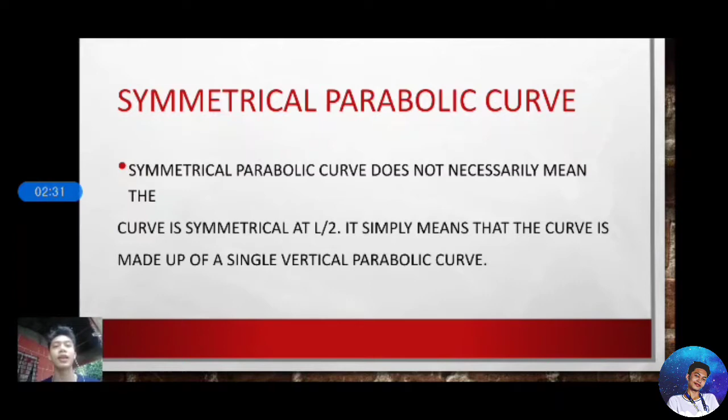Para sa mga examples, dito yung tatlong examples natin nakahanda. For example number 1: a summit curve has slopes of 6% and negative 4%, intersecting at PI. The offset distance from the PI to the curve is 2 meters. Determine the following: A. Length of curve. B. The location of the highest point from PI.

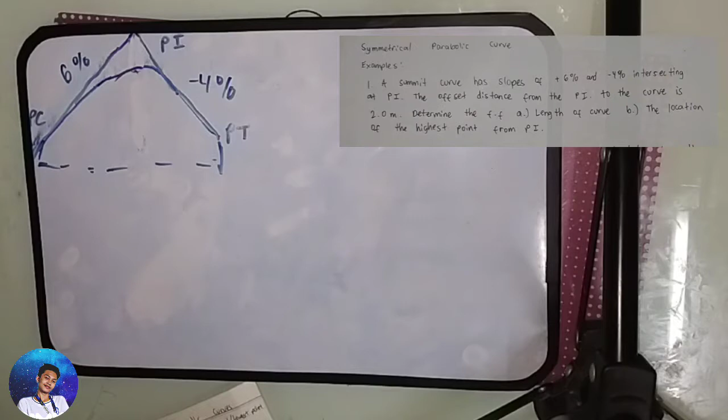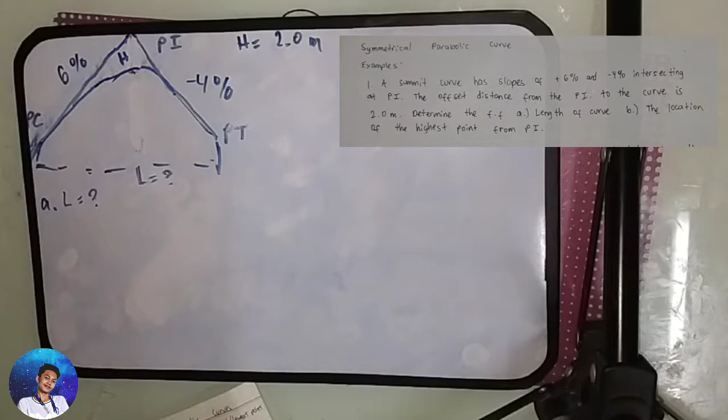So for our first example, we are given a grade of 6% for our back tangent, and for our forward tangent, negative 4%. So we are also given an offset distance, so our H is equal to 2.0 meters. We need to find first our A, length of curve, our L, and B, the location of our highest point.

So first, our L, we need to use our formula for a summit curve: H equals L over 8 times G sub 1 minus G sub 2. So 2.0 equals L over 8 times our G sub 1, 0.06, minus negative, so magiging positive, 0.04.

So we know our L, we need to compute. There's no shortcut solve, walang shortcut, so ganito yung ginagawa ko: 2.0 divided by 1 over 8 times 0.06 plus 0.04. So yun yung sagot, 160. So our L is 160 meters.

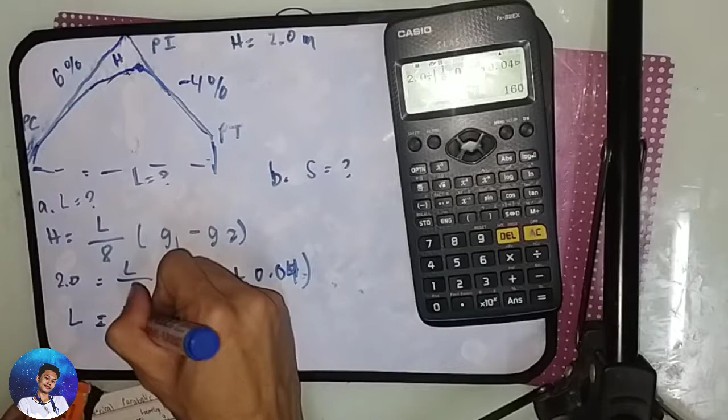And that's our A. So we can now proceed for our B, for the location of our highest summit curve. So from this, 160 meters, this L over 2 is 80, and this is also 80.

So our S, from PC, we need to use this formula: S equals G sub 1 times L over G sub 1 minus G sub 2. So S equals 0.06 times our L, 160, over 0.06 minus negative 0.04, so magiging positive, 0.04.

So we can get our S, or our location of our highest point. So our S: 0.06 times 160 over 0.06 plus 0.04, so 96 meters from PC.

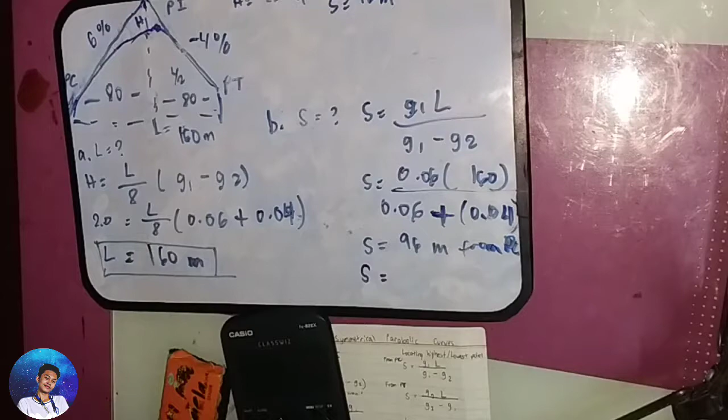But from our question, we need to find the highest point from PI. So we need from PI: 96 meters minus our S from PI, 96 minus 80 meters, because this is 80. So kailangan natin mahanap ito, ang distance na simula sa PI hanggang dito, kailangan natin mahanap.

So S, 96 minus 80 is 16, I guess. 16. So our location from PI is 16 meters from PI. So this is our final answer.

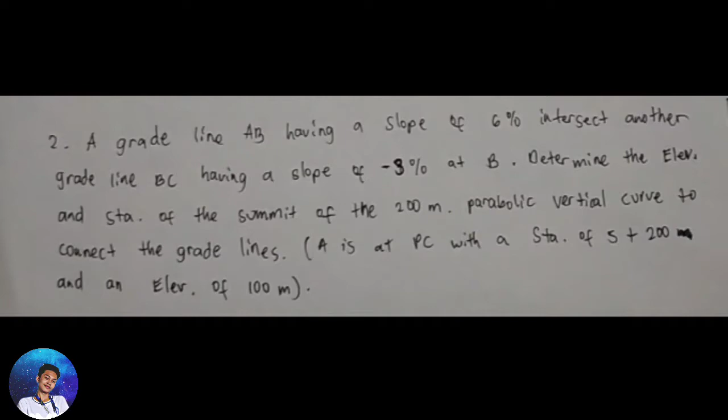For the second example: a grade line AB having a slope of 6% intersects another grade line BC having a slope of negative 3% at B. Determine the elevation and station of the summit of the 200-meter parabolic vertical curve to connect the grade lines. Yun, hanapin daw yung elevation tsaka station ng summit o yung highest point ng curve. A is at PC with a station of 5 plus 200 and an elevation of 100 meters.

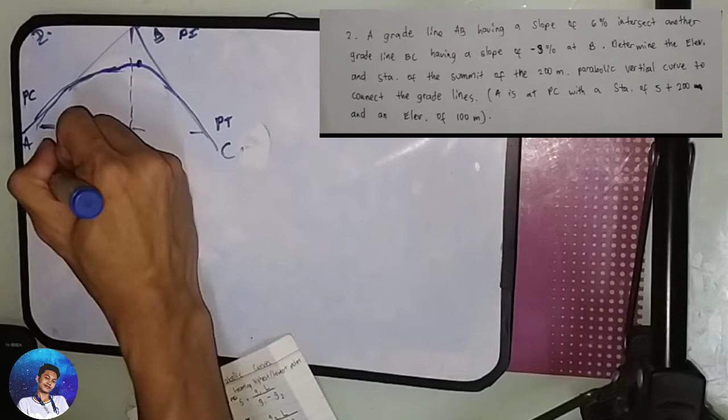So for our number 2, we need to find the elevation and stationing of the summit or the highest point of our curve. So first, we need to find the highest point. From PC, we need to use this formula: S equals G sub 1 times L over G sub 1 minus G sub 2.

0.06, I forgot, this is 0.06, a 6% grade, and this is negative 3% grade. And we're already given our L, or length of our curve, 200 meters, so our L over 2 is 100 meters. So our 0.06 G sub 1 times 200 over 0.06 minus negative 0.03 plus 0.03.

So our S, or highest point for our summit curve: 0.06 times 200 over 0.06 plus 0.03, which equals 133.33. So 133.333 meters. So we can calculate the station of our highest curve.

So this is 133.33. So the remaining, 133.333 minus 100 is 33.33. That's our distance from our highest point to PI, so right from PI, 33.33 from PI.

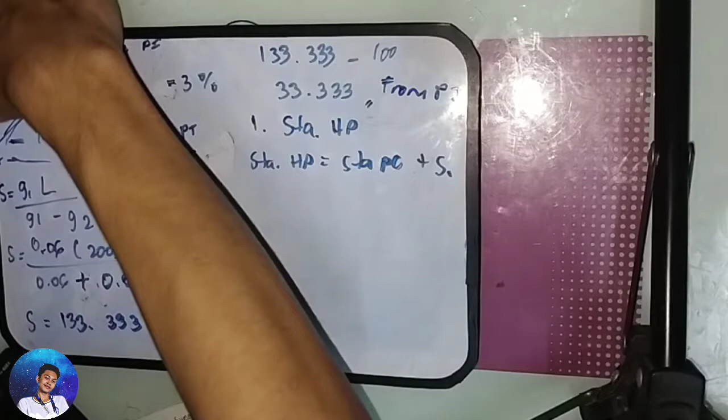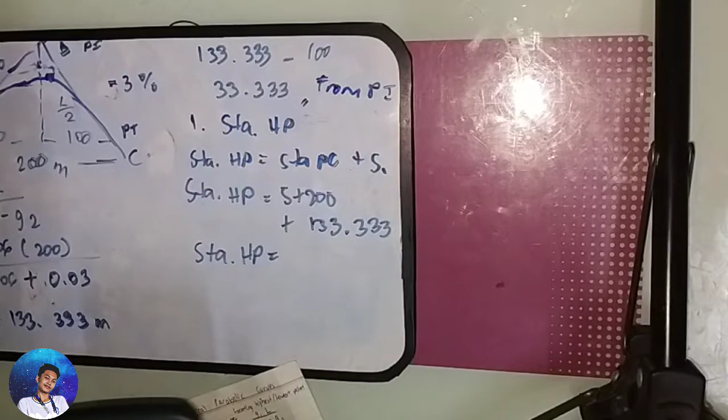133.333. So for number 1, for our stationing at HP: 5,200 plus 133.33 equals 5,333.333 is our station for the highest point. That's our number 1. So for our number 2.

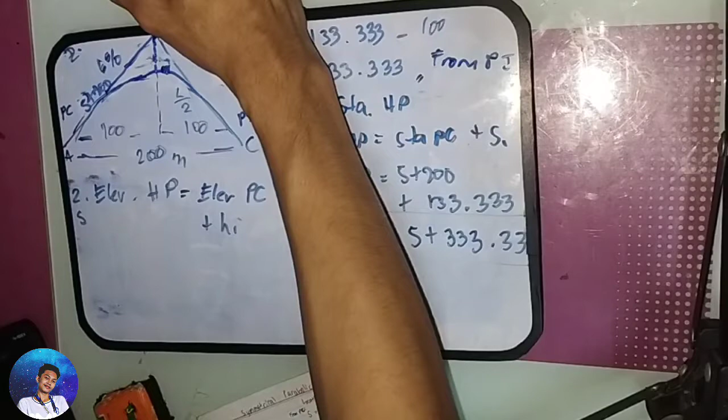For the elevation at highest point, the formula is: elevation of HP equals elevation of PC plus H sub 1. That's our H sub 1, plus elevation of PC. So once we solve that, we get the elevation of HP.

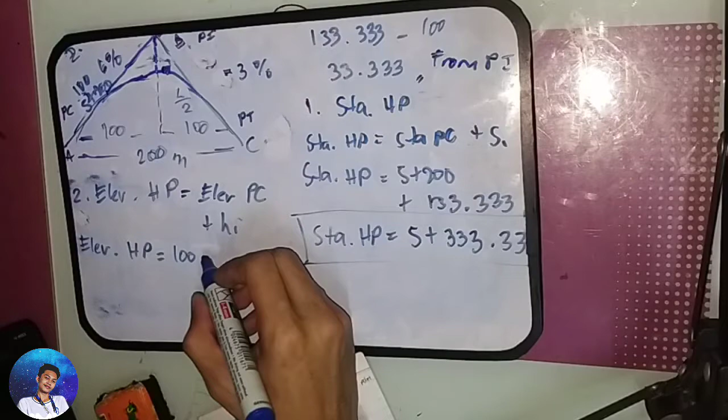So for the elevation of the highest point, we are given 100 meters as elevation. So 100 meters plus, we need to find H sub 1. So H sub 1 equals one half of our G sub 1 grade times our S sub 1.

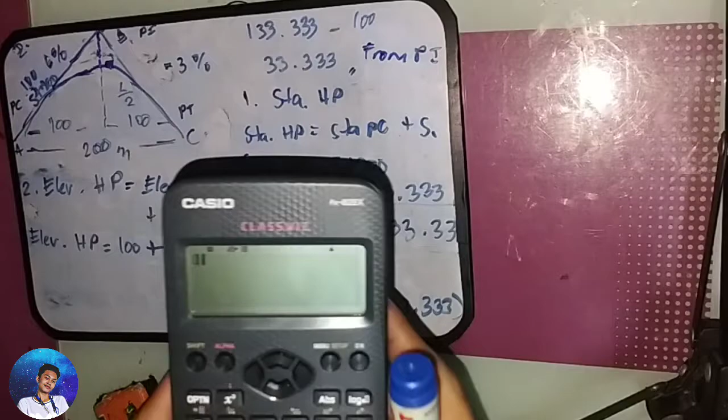So one half of our 0.06 times our S sub 1, 133.333. So our H sub 1 is one half of 0.06 times 133.333, which equals 3.999.

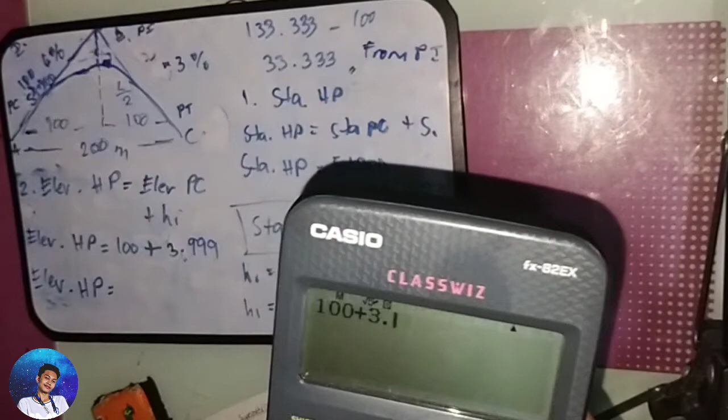So 100 plus 3.999. So we put that into our elevation for the highest point of our summit curve. So 100 plus 3.999 equals 103.999 meters. Don't forget our sign. So that's all for our number 1 and our example number 2.

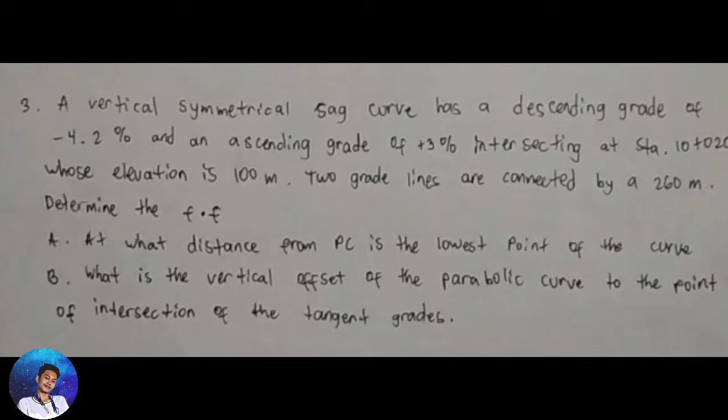For the last example, number 3: a vertical symmetrical sag curve has a descending grade of negative 4.2%, and an ascending grade of 3%, intersecting at station 10 plus 020, whose elevation is 100 meters. The two grade lines are connected by a 260 meter curve. Determine the following: A. At what distance from PC is the lowest point of the curve? B. What is the vertical offset of the parabolic curve to the point of intersection of the tangent grades?

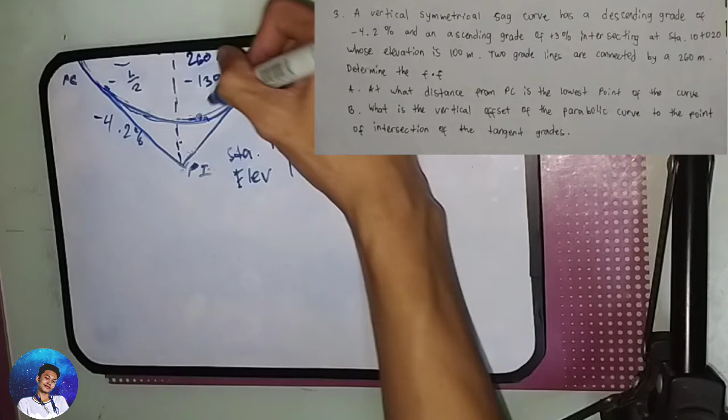So we need to find the distance from the PC to the lowest point of the curve. So let's find the lowest point of our curve. First, to get that, we use this formula: from PC, S equals G sub 1 times L over G sub 1 minus G sub 2. So we get S.

So our G sub 1 is negative 0.042 times 260 over negative 0.042 minus our G sub 2 of 3%, 0.03. So the value of our S is negative 0.042 times 260 over negative 0.042 minus 0.03. So our S is 151.667 meters. So yes, this is our number 1.

So for our number 2, we need to find the vertical offset, or our H. This is our vertical offset, so we look at our formula for H. Since it is a sag curve, we need to use this formula, not the other one. It is for the summit: H equals L over 8 times G sub 2 minus G sub 1.

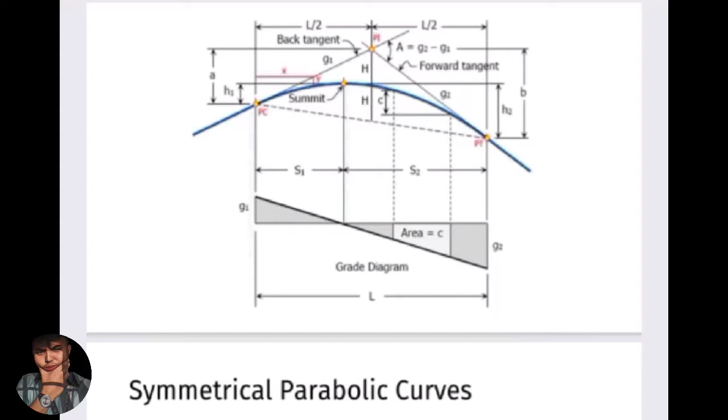So ano nga ba ang pinagkaiba ng parabolic symmetrical curve sa parabolic unsymmetrical curve? Symmetrical parabolic curve does not necessarily mean na symmetrical yung curve at L over 2. It simply means that the curve is made of a single vertical parabolic curve. Then, using two or more parabolic curves placed adjacent to each other, it will be called an unsymmetrical parabolic curve. So in a symmetrical curve, L sub 1 and L sub 2 are equal, while in an unsymmetrical curve, L sub 1 can be greater than L sub 2, or L sub 2 can be greater than L sub 1.

So let's now proceed sa ating problem solving.

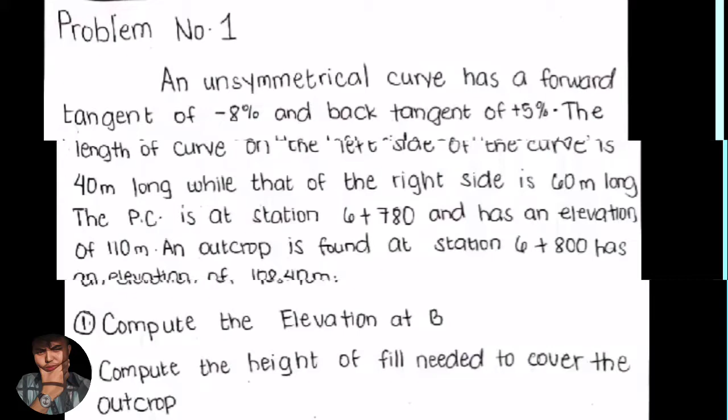An unsymmetrical curve has a forward tangent of negative 8% and back tangent of positive 5%. The length of curve on the left side is 40 meters long while that of the right side is 60 meters long. The PC is at station 6 plus 780 and has an elevation of 110 meters. An outcrop is found at station 6 plus 800 and has an elevation of 108.40 meters. Number 1, compute the elevation at B. Number 2, compute the height of fill needed to cover the outcrop.

So ano nga ba yung outcrop? Sabi ni Google, an outcrop is a rock formation that is visible on the surface.

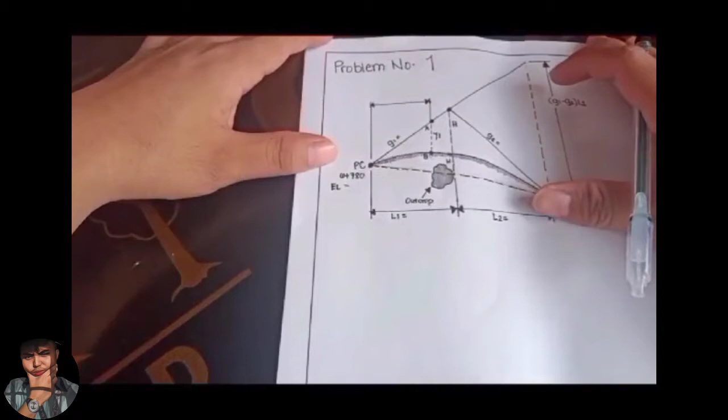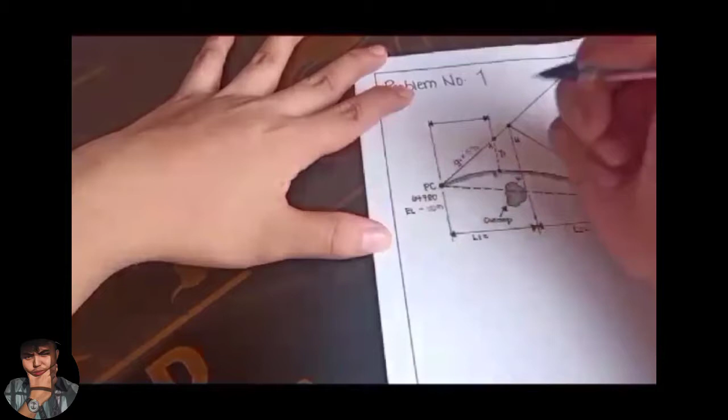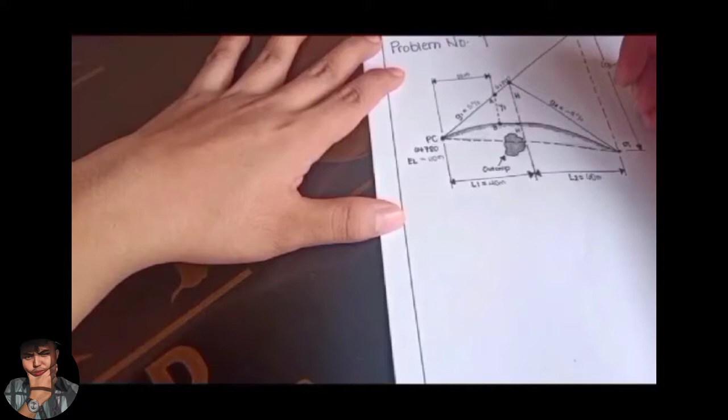So here is our figure for problem number 1. Given tayo ng positive 5% na grade at negative 8% na grade. At station PC, meron tayong 6 plus 780 and it has an elevation of 110 meters. At station A, meron tayong 6 plus 800. Therefore, ang distance natin from PC to point A ay 20 meters, kasi 800 minus 780 is equals to 20. Ang L sub 1 natin ay 40 from left and 60 from right, meters yan. Meron tayong outcrop dito which has an elevation of 108.40. So yun lang ang ating given.

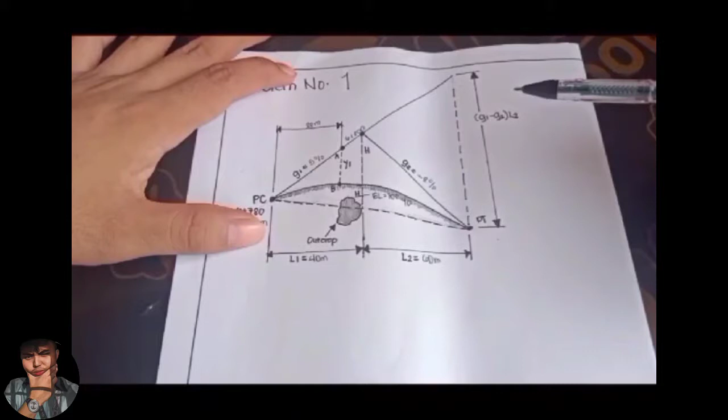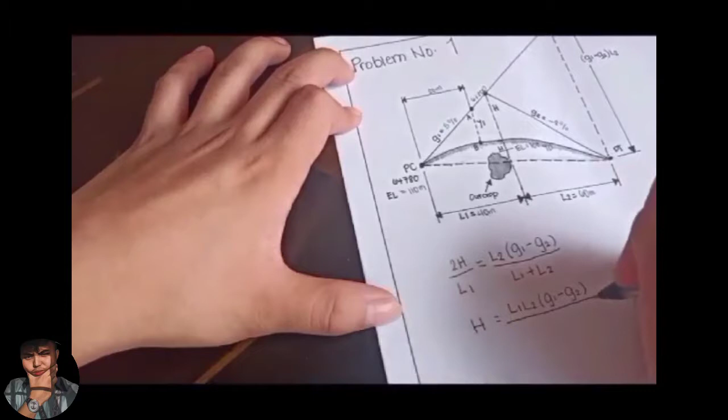So in order to get the value of H, we need to use the formula: 2H over L sub 1 is equals to L sub 2 multiplied by G sub 1 minus G sub 2, all over L sub 1 plus L sub 2. By manipulating the formula, we came up with H is equals to L sub 1 times L sub 2 multiplied by G sub 1 minus G sub 2, all over 2 times L sub 1 plus L sub 2.

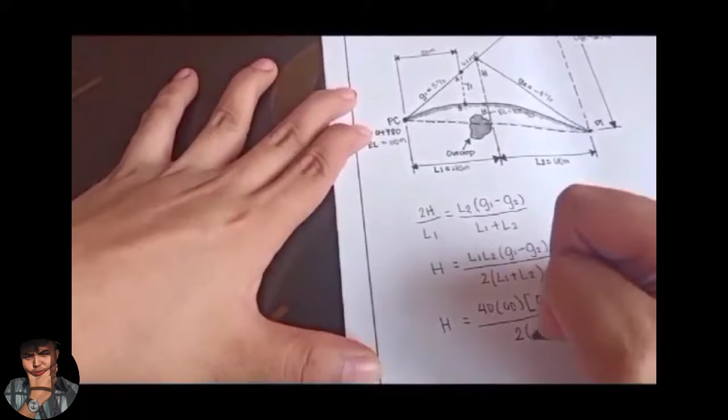So next is substituting the values. H is equals to 40 times 60 multiplied by 0.05 minus negative 0.08, all over 2 times our L sub 1 which is 40, L sub 2, 60. Kapag binisa sa value, magiging sagot is 1.56. So meron na tayong value ng H.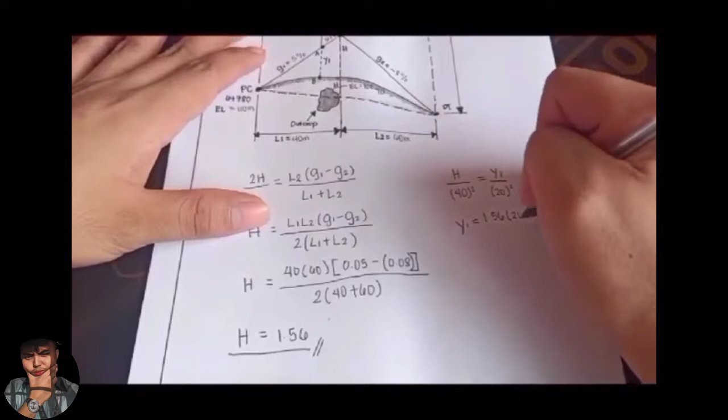Since meron na tayong value ng H, pwede na natin makuha yung ating Y sub 1. H over 40 squared equals Y sub 1 over 20 squared. Since meron na tayong value ng H na 1.56, Y sub 1 is equals to H multiplied by 20 squared all over 40 squared. Therefore, our Y sub 1 is 0.39.

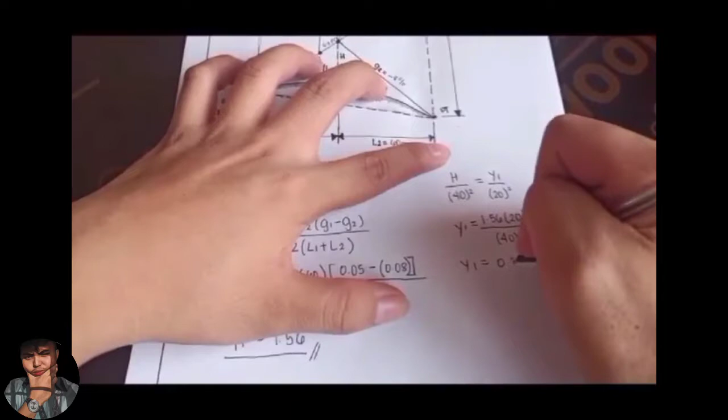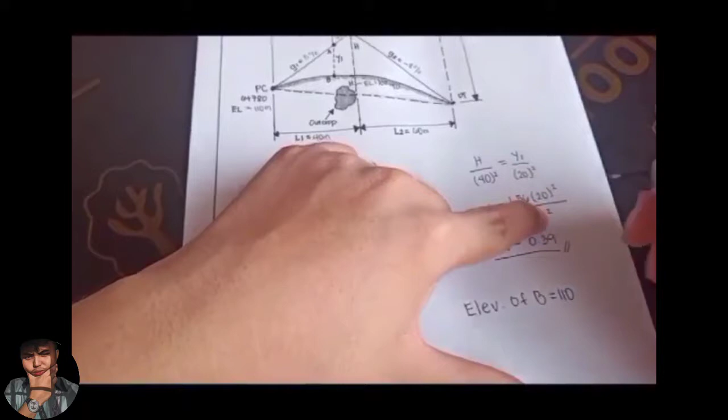Since meron na tayong Y sub 1, pwede na natin kunin yung elevation of B. Therefore, elevation of B is equals to 110 plus 0.05 multiplied by 20, minus our Y sub 1, which is 0.39.

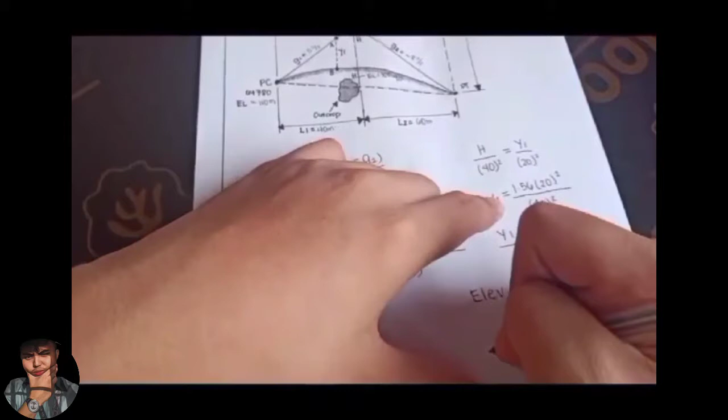Therefore, our elevation at B is 110.61 meters. So yan ang ating elevation at B.

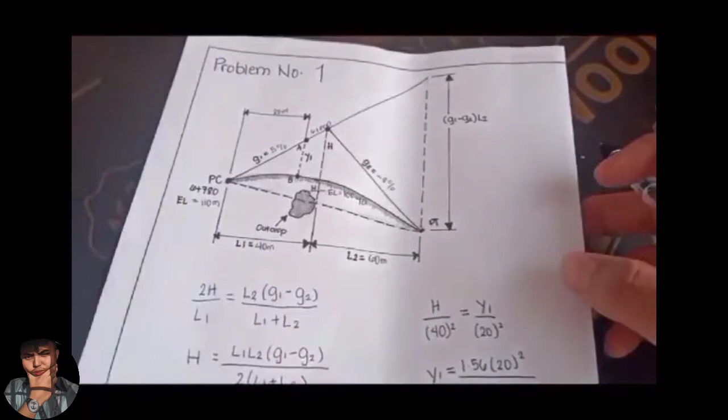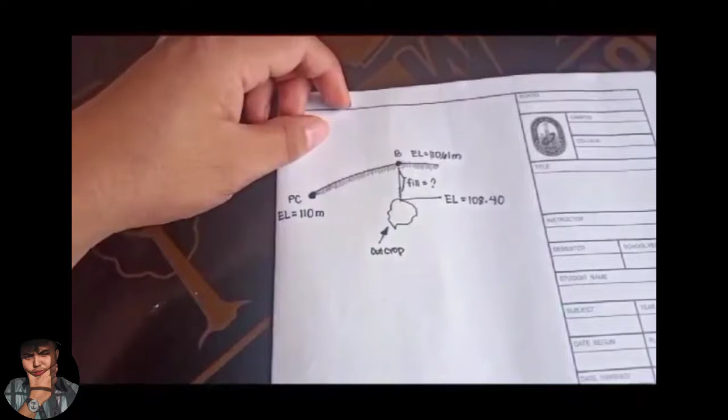So sabi sa ating condition number 2, ano daw yung height of fill needed to cover the outcrop. So kapag zoom in natin ito, yung kakalabasan. Nakuha na natin yung ating elevation at point B, which is 110.61, and the elevation of the outcrop is 108.40 meters. So in order to get the height of the fill needed to cover this outcrop, we need to subtract the elevation at B to the elevation of the outcrop.

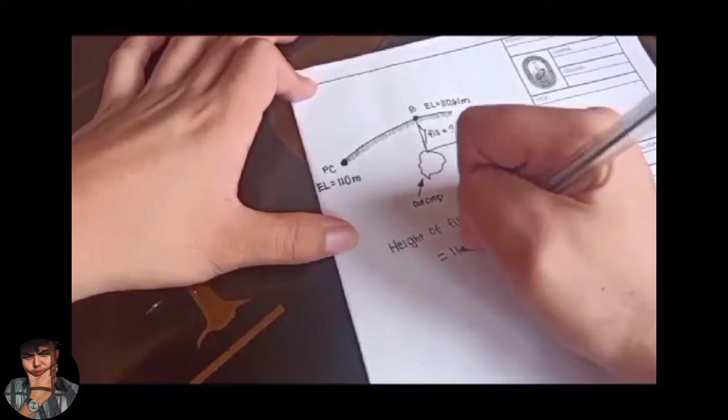So, height of fill needed is equals to 110.61 minus 108.40. Therefore, it is equals to 2.21 meters. So ito yung height ng fill na needed. So that is our problem number 1.

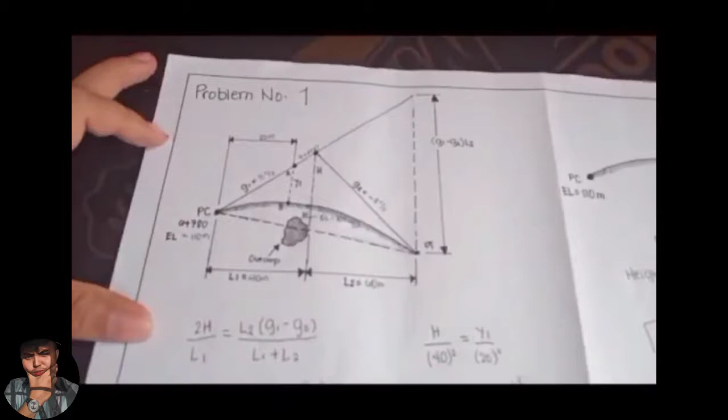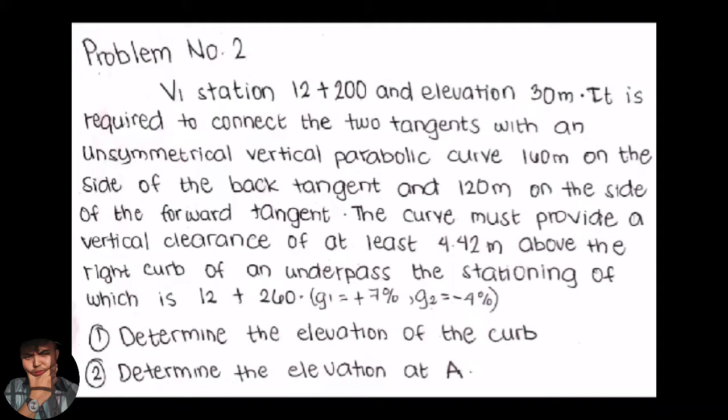V sub 1 station 12 plus 200 and elevation 30 meters. It is required to connect the two tangents with an unsymmetrical vertical parabolic curve, 160 meters on the side of the back tangent and 120 meters on the side of the forward tangent. The curve must provide a vertical clearance of at least 4.42 meters above the right curb of an underpass, the stationing of which is 12 plus 260. Knowing that G sub 1 is equals to positive 7% and G sub 2 is equals to negative 4%. Number 1, determine the elevation of the curb. Number 2, determine the elevation at A.

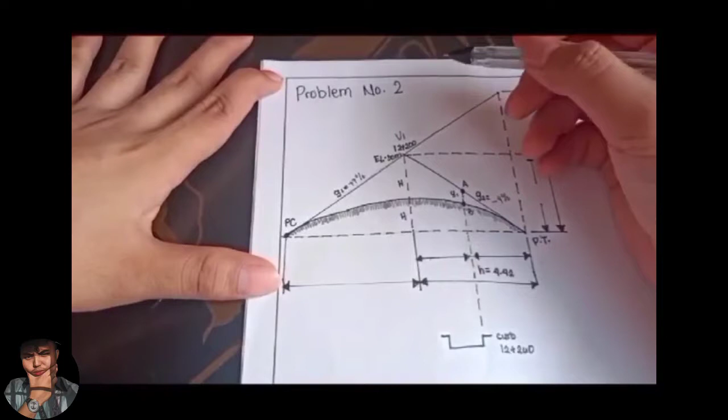So this is our figure for our problem number 2, which is a summit curve, since ang grade natin is from positive to negative. Kaya ganito. So sabi ang G sub 1 natin is positive 7%, and ang G sub 2 is negative 4%. And meron daw tayong at V sub 1 station, meron tayong 12 plus 200 with an elevation of 30 meters.

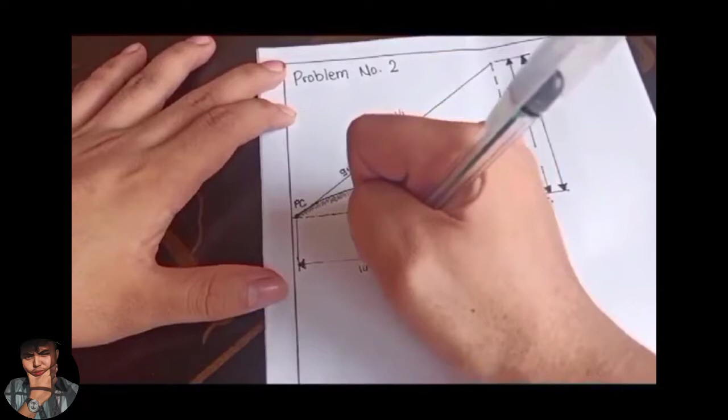At the back tangent, meron tayong distance, which is 160 meters, and the forward tangent has 120 meters. So here meron tayong height na given, which is 4.42. And our curb is at station 12 plus 260, which is dito. So since ito ay 120, so therefore ito ay 60 meters, and this is 60 meters also.

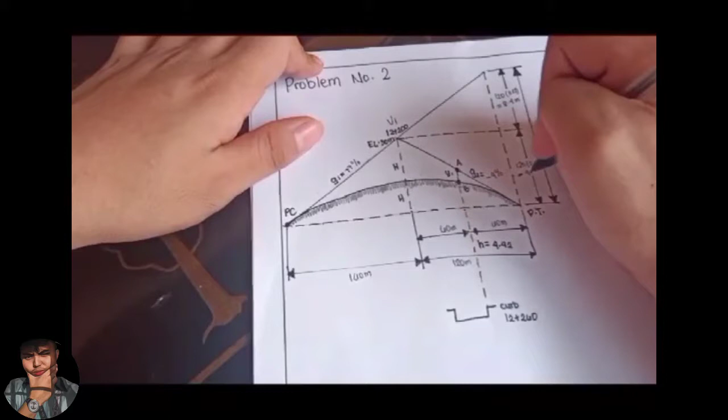Kailangan natin compute yung side na to. So 120 multiplied by 0.07, rather, this will be 8.4 meters, and this part is 120 multiplied by 0.04. Therefore it is equals to 4.8 meters. Therefore it is 13.2 meters in total. Pwede nyo namang diretsuhin na lang, same lang din naman lalabas. 0.11 multiplied by 120 is equals to 13.2 pa rin.

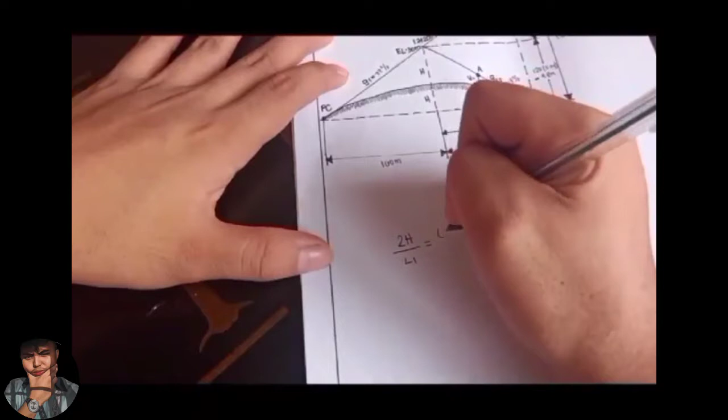Ayun, compute ulit tayo ng H. So using this formula, 2H, for L sub 1 is equals to G sub 1 minus G sub 2, multiplied by L sub 2, all over L sub 1 plus L sub 2. Then 2H is equals to 160... is equals to, nakuha natin 13.2 over L sub 1 plus L sub 2 is equals to 280. Therefore, ang ating H is equals to 3.77 meters. So yan ang ating H.

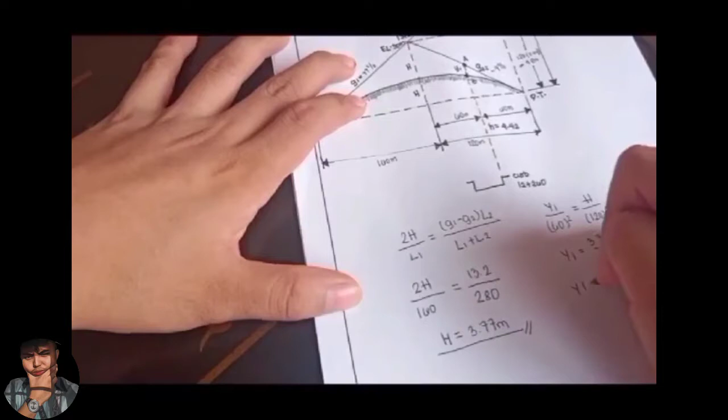Ngayon, kukunin naman natin yung ating Y using the squared property of parabola. So meron tayong y sub 1 over 60 squared is equals to h over 120 squared. Since meron na tayong h, so ang y sub 1 natin is equals to 3.77 multiplied by 60 squared over 120 squared. And y sub 1 is equals to 0.94.

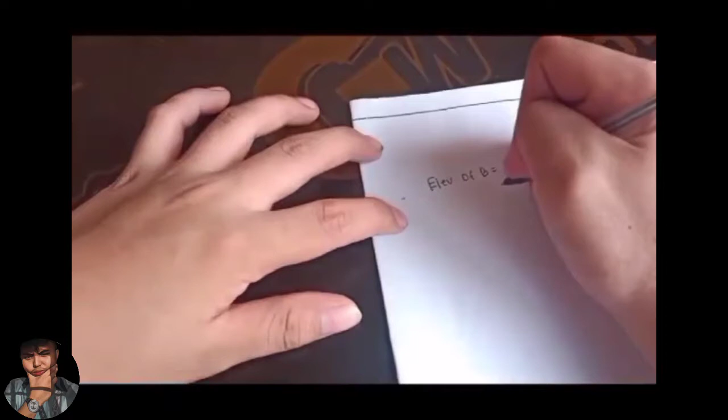So kagaya ng problem number 1, pwede na natin makuha yung ating elevation at B, since nakuha na natin yung y sub 1 natin. So elevation at B is equals to 30 minus 60 multiplied by 0.04, minus 0.94. So elevation at B is equals to 26.66 meters. Saan galing yung 30? Dito po galing yung 30 natin.

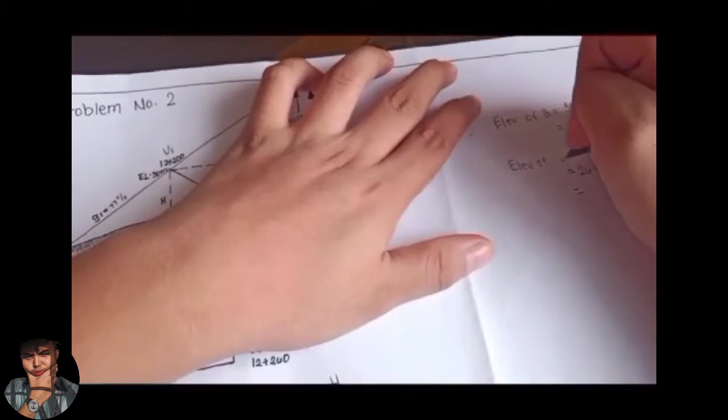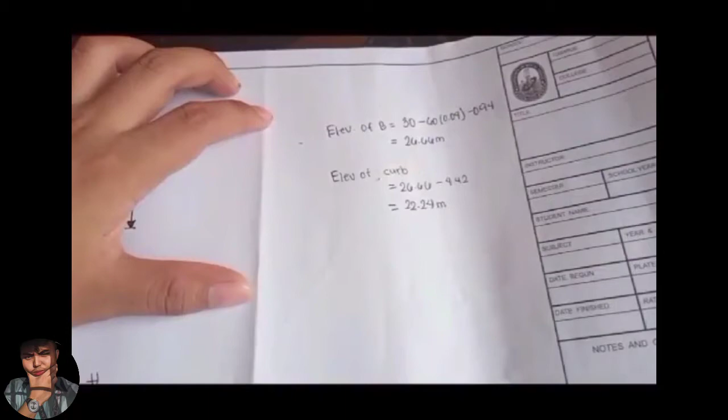So next na makukuha na natin is yung elevation ng curb. Para makuha yung elevation ng curb, kailangan lang natin gawin is subtract yung elevation at B dun sa ating height minus 4.42. So therefore, ang ating elevation of the curb dito, curb pala dapat, not curve, curb. So elevation of the curb is 22.24 meters. Ayan ang ating condition number 1.

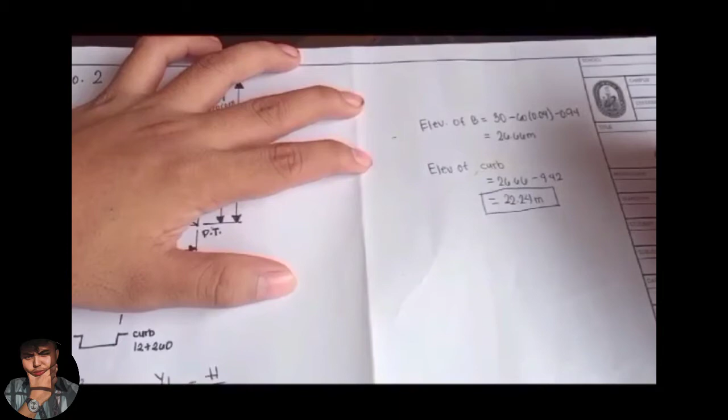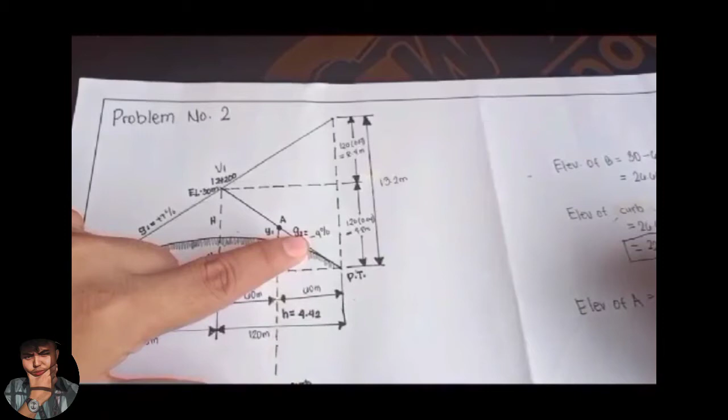So for number 2, determine the elevation at A. Napakadali lang nun. So in order to determine the elevation at A, yung next na kailangan natin hanapin is yung elevation of A. So elevation of A is equals to, ito yung A natin, so it's 30 minus our grade, which is our slope, 0.04 multiplied by 60. Therefore, our elevation at A is equals to 27.6 meters.

So, here is our problem number 3. A negative 3% grade meets a positive 5% grade near an underpass in order to maintain the minimum clearance allowed under the bridge and at the same time introduce a vertical transition curve in the grade line. It is necessary to use a curve that lies 200 meters on one side of the vertex of the straight grade and 100 meters on the other.

The station of the beginning of the curve, 200 meter side, is 10 plus 000 and its elevation is 228 meters. Number 1: determine the elevation at station 10 plus 040. Number 2: if the uphill edge of the underside of the bridge is at station 10 plus 220 and at elevation 229.206 meters, what is the vertical clearance under the bridge at this point?

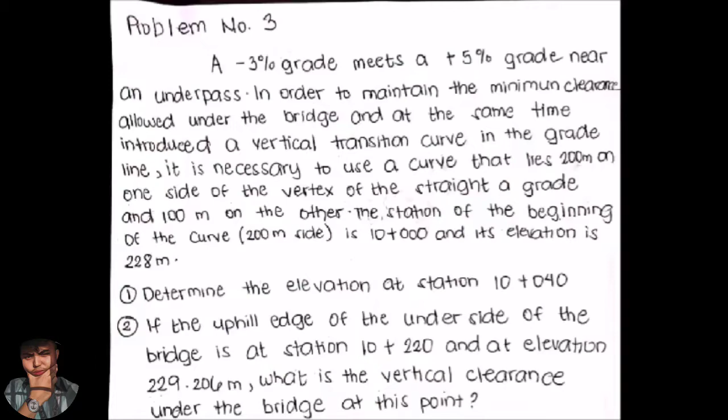So what exactly is vertical clearance? According to Google, vertical clearance means the minimum specified height of the bridge or overhead projections above the roadway.

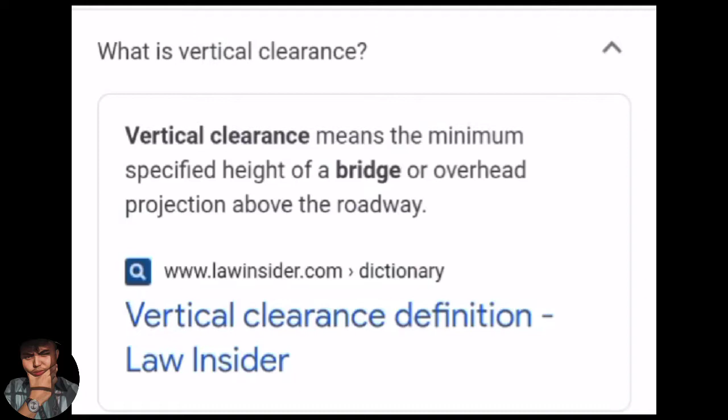Commonly we see this in establishments, especially in malls. Vertical clearance also applies to electric posts where we see wires. Commonly, the minimum vertical clearance is 10 feet from the ground.

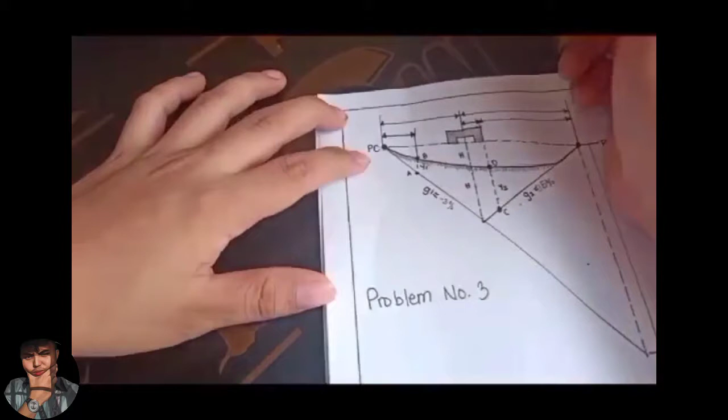Okay, so this is our figure for problem number 3. As stated in the problem, we have a grade or slope of 3% and 5%. The distance on this side is 200 meters, and the other side is 100 meters.

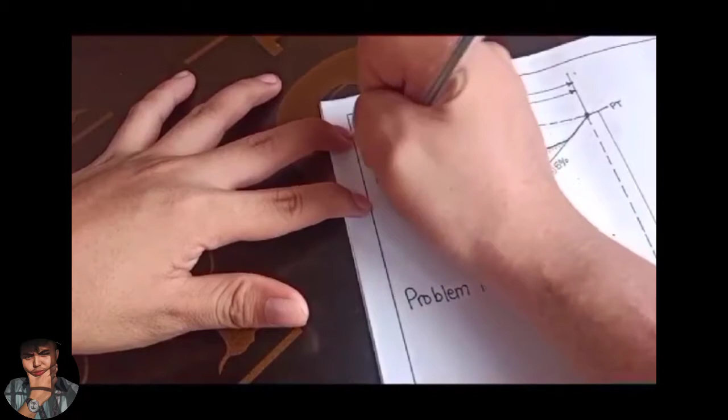The station PC is 10,000 and it has an elevation of 228 meters. So considering A as station 10 plus 040.

Therefore, the distance here is 40 meters. Next, let's get this side: 100 multiplied by 0.03 plus 0.05, and it equals 8.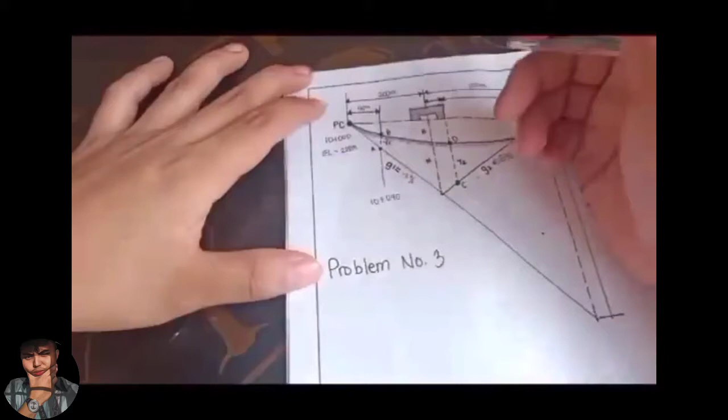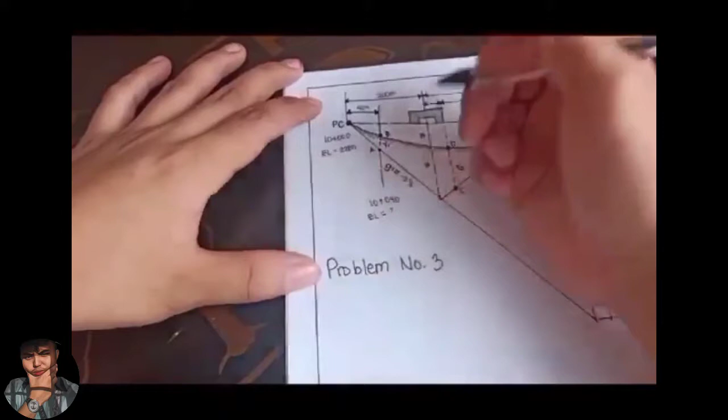Since we're first getting the elevation at this point per station, let's not consider the bridge yet. So we can now get our h.

So 8 over 300 equals 2h over L sub 1, which is 200. Therefore, our h equals 2.67 meters.

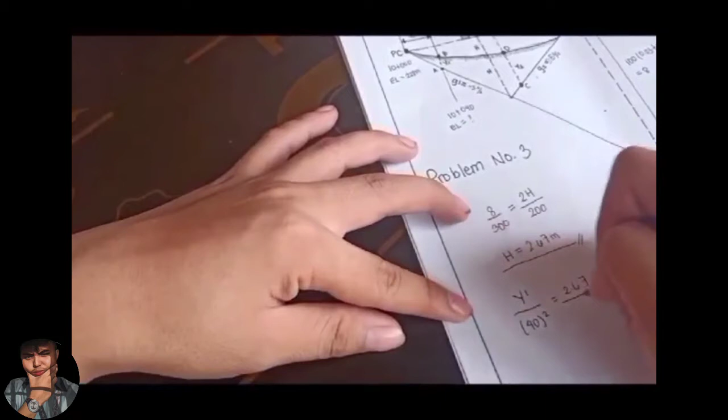By applying the squared property of parabola, we can get the value of our y sub 1. So 2.67 over 200 squared. Therefore, our y sub 1 equals 0.107.

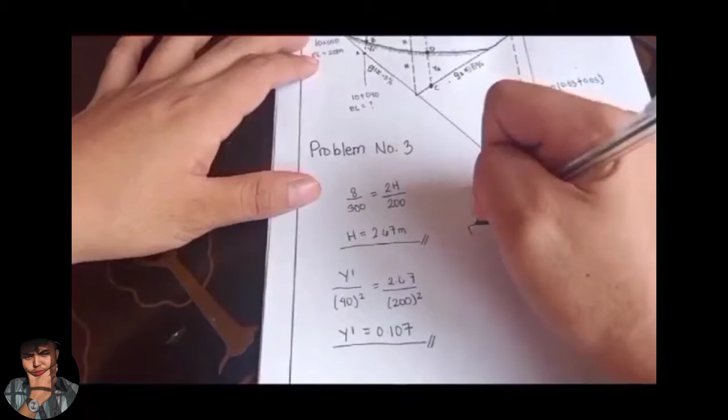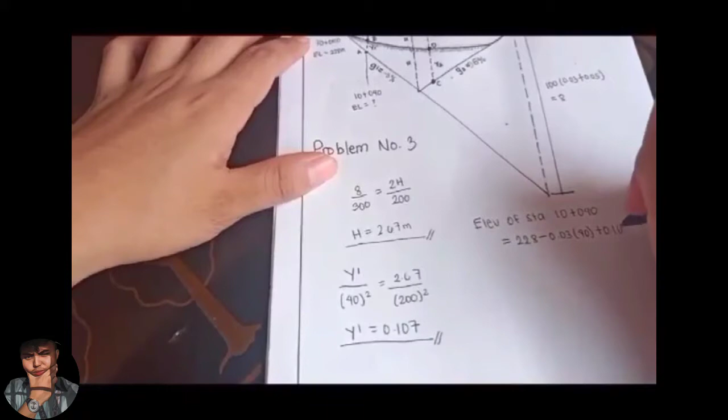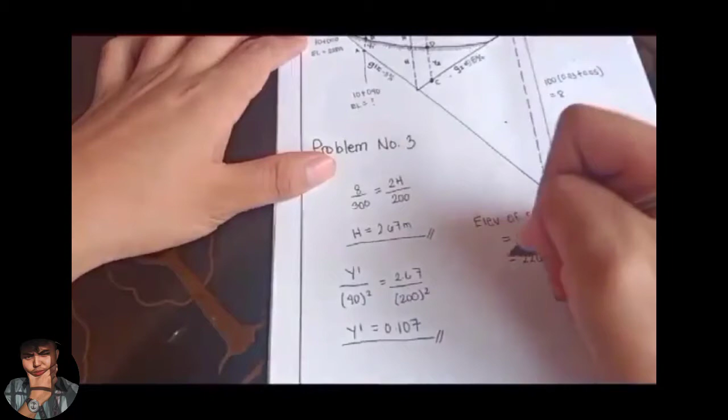Now we can get the elevation at 10 plus 040. Elevation of station 10 plus 040 equals 228 meters minus 0.03 multiplied by 40 meters plus 0.107. Therefore, our elevation at station 10 plus 040 equals 226.907 meters. That's our answer for number 1.

For number 2, the station PI is 10 plus 220, and the elevation of the bridge is 229.206 meters.

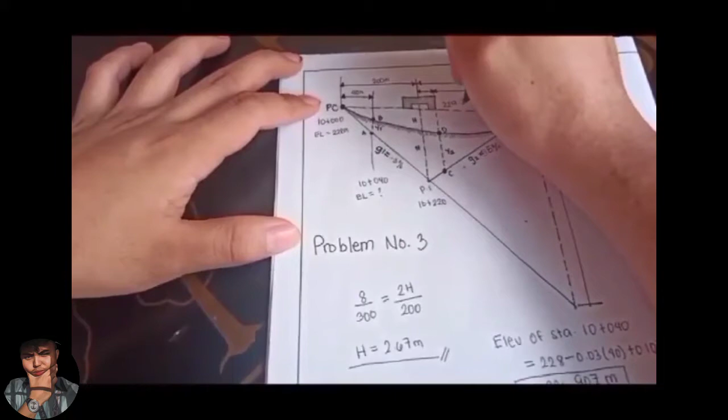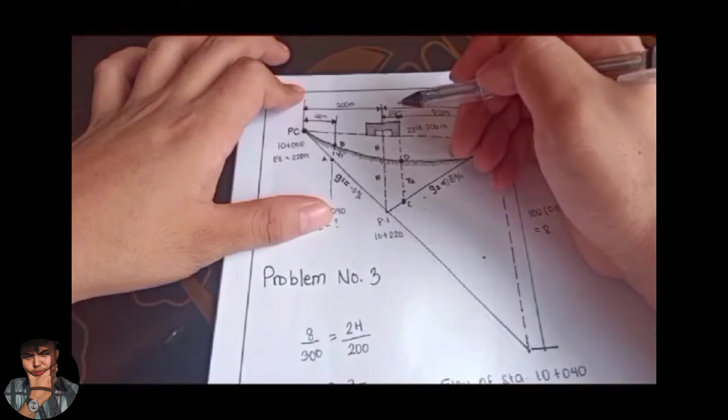Since this is 200 and this is 220, this part of the bridge is 20 meters. Therefore, 100 minus 20 equals 80 meters.

Since we already have our h, we can proceed directly to getting our y sub 2. By applying the squared property of parabola, we come up with: y sub 2 over 80 squared equals h over 100 squared.

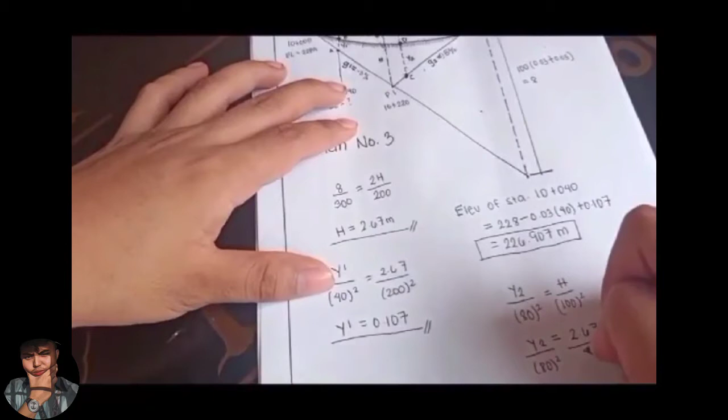Therefore, y sub 2 equals 2.67 over 80 squared divided by 100 squared. So y sub 2 equals 1.71 meters.

So here we go. Elevation of PI equals elevation of PC, which is 228, minus 200 multiplied by 0.03. Therefore, elevation of PI equals 222 meters.

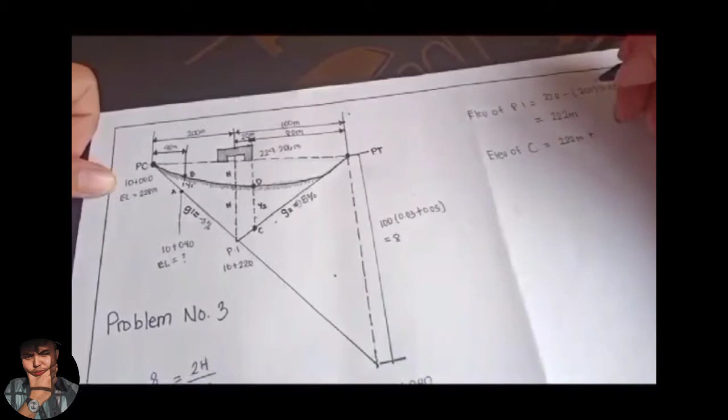So now we have PI. Next is elevation of C, which equals 222 meters plus, since this is going up, 0.05 multiplied by 20. Elevation of C equals 223 meters.

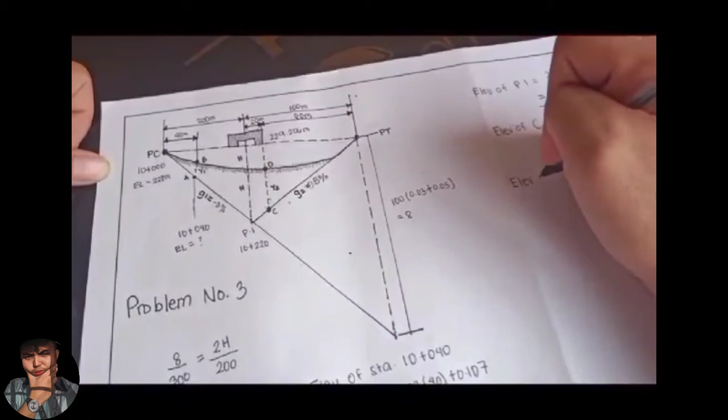Then next is elevation at D, which equals 223 plus our value of y sub 2, which is 1.71. Therefore, it equals 224.71 meters.

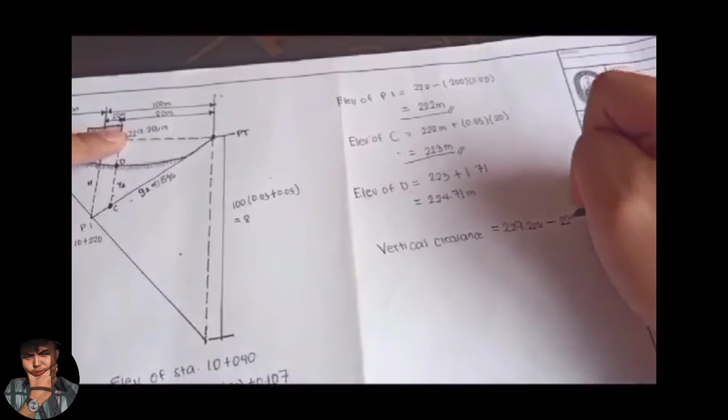So now we can get our vertical clearance, which equals 229.206 minus elevation at D, which is 224.71. Therefore, our vertical clearance equals 4.496 meters.

So that's our problem number 3.